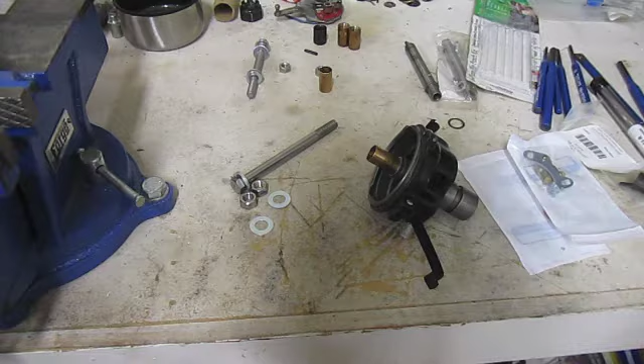Okay, I'm back, and I didn't have to go to any store because I'm sure some of you following along realize this. I didn't realize it till after I turned off the camera on the last clip. Remember, I had a small bolt, but I also have a big bolt too, right? And while it's 3/8, it is a longer bolt. So this is, remember from last time, it's like a little over 5, like 5 1/4. So what that means is I think this will work fine.

And again, the washers, maybe they weren't as precise, but these washers are good enough to cover the top of that bushing. So what I can do now is slide this in. And I'm just using 2 washers to be safe on the other side. Now that gives me enough thread right there where I can then put this on. Tighten this down.

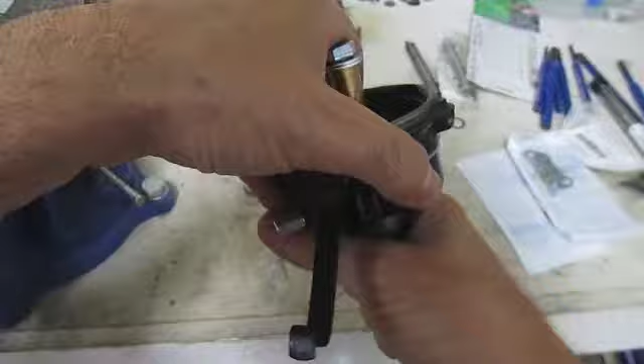Now I want to get things aligned, right? So get them aligned there. It's more important to get lined up here. I don't want that bushing to be off center, so I'm going to try to watch that as I go. So I think what I may do is, if we come over here to the vise, maybe I'll mount it in the vise and then try to turn it from the bottom. So I think that's what I'll do.

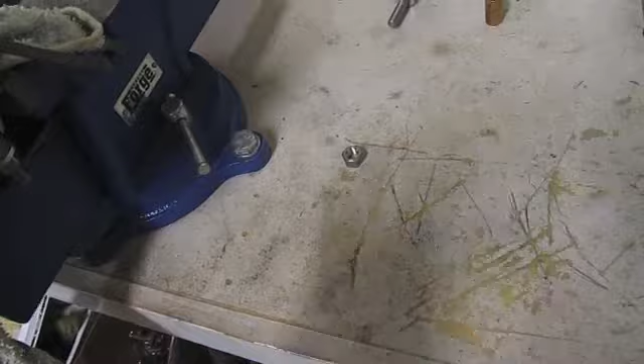So let me, sorry, not as prepared as I thought. Let me rest this here. All right, and this doesn't have to be too tight. Okay, and then what I'll do next is, if you look over here on the side, this is the bolt right here. So I'm going to actually tighten. All right. So we'll try to get an angle there of everything. Let me back off a little bit. Oh, that's about as wide as I can go.

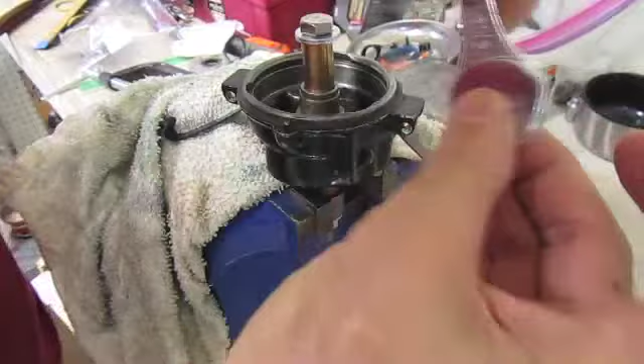All right, and then I need to get a wrench on here, right? So I think the wrench I'll need, is this going to be 1/2 inch, a little bit bigger. I'll probably need a 9/16. Will 9/16 do it? Yep, 9/16. Okay, so I've got the top and the bottom here, so I'm gonna tighten from the bottom and watch it from the...

So the idea is, I hope this makes sense as you're watching. So as I tighten this bolt, it's gonna squeeze, it's gonna basically push this down. Well, you'll see. So let's try this. So I'm gonna watch it go. I'm just slowly, it hasn't gotten enough where I need a second wrench yet. All right, so it's now tight. I'm just checking. All right, that bushing looks reasonably straight.

I'm doing this by hand. I'm not using a power tool, obviously, because you could mess something up really fast. So I'm going really slow with a hand wrench. Oh, let me hold that top. It's now, I think I'll have to get a second 9/16. Yeah, my wrenches are all over the garage because I got stuff going on. So let me see if I can bring up a second. Oh, good. Luckily I got lots of 9/16. All right, so now let me check again. I'm just visually inspecting here to make sure nothing's off.

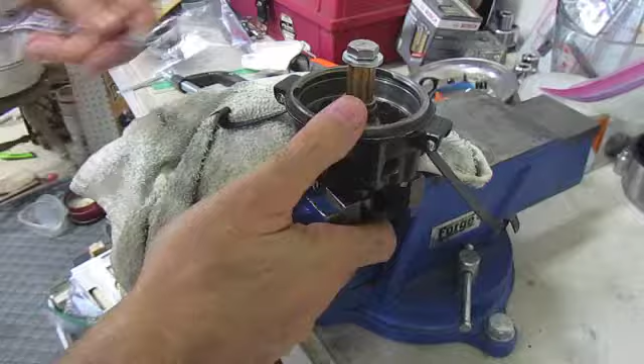Okay, so now as I hold this, oh, now I'll just screw the top. Okay, so now it's easier. I can just spin it on the top. Is that going in all right? Let's see. All right. Well, it's screwing on there. I guess I could mark it with a magic marker and you could see it. So let me get another angle here as I go. And zoom in.

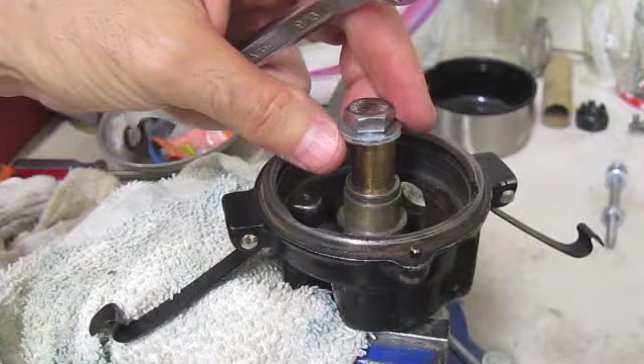Now the washer's a little off, but it's flat against the bushing. So I could back off and center it. Will I do that? Yeah, I'll just maybe do that real quick. So here, let me just back off it real quick. Loosen it a little bit. Get those washers centered. And then, well, did that help? Hold on. All right.

Okay, that's a little better centered now. So let me just continue now. Now the good news is bushings don't cost that much. They're relatively cheap. So if you mess up this part, I already know how to take the bushings out. So if you mess it up, the worst case is you just take out the bushings and put a new set in again. I don't want to do that. I'd like to get it right the first time.

So this appears to be working. I'm eventually going to get down to the bottom threads on the bolt at some point. In fact, I think I'm there right now. So if we look at the bottom, it definitely got lower, right? Well here, I can compare. Let's look at before and after. So it definitely is pushing the bushing into the housing of the distributor. But I got to the end of my bolt here, so to speak.

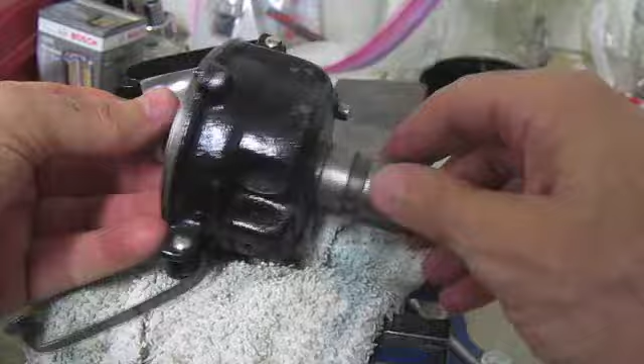But what I'm gonna try to do real quick is look if that other bolt, take this out over here. Let's see if this one now, this is the 5/16. Yeah. So a little shorter bolt with the washers. Oh, look at that. That might just catch it. So let me do that. All right. So it looks like I found out by trial and error that you might need 2 different size bolts to do this project.

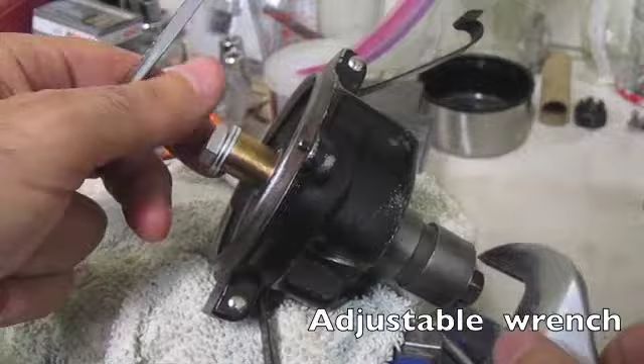So now, same as last time, I'm going to make sure the washers look centered. Started on the bottom, and now I might be able to just do it like this. Now, these aren't 9/16, right? So it's a 1/2 inch. So now I got to switch to a 1/2 inch, but then I need another one. I got to scrounge for a 1/2 inch. Do not have one, so in a pinch, I am going to use a crescent wrench. Since there isn't a huge amount of force on here, I'm just gonna use this.

God, this is really taking up a lot of time, sorry.

Okay, so now, as we come over here a bit, I will continue now to basically wrench this down. Oh, washers are off. Hold on. Get that lined up. That's not right. Okay, so I think maybe the bigger washers would be better if I had a choice. So let me get those lined up one more time. All right, that's a little better. Not perfectly centered, but better centered. And then you just keep wrenching down.

Okay, it's going, but it's taking a while because I'm doing it by hand. I want to be careful. It's taking longer than I thought. But let's stop and do another checkpoint. So make sure it's not going in wrong, like out of center. That's pretty centered on the top. That's going in, and again, if we just compare it to another bushing, I got it probably about halfway in.

So I'm gonna keep doing this the rest of the way, and I should have enough threads here. Well, we'll find out. I could run out of threads on the bottom here too, but I'm gonna keep doing this so you get an idea of how I'm pushing the bushings in as I'm using this bolt method.

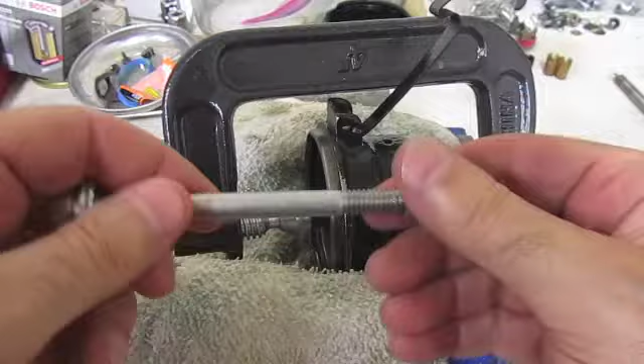So something unexpected happened when I was doing this bolt method. Somehow I stripped the nut here on these threads, and it was perfectly matched. It was a brand new bolt and nut, and I was tightening it down, and I don't know, but you can see I just stripped it out. So these aren't expensive, but I wasn't expecting that. So that made me switch over to the C-clamp method.

So this is a 4-inch C-clamp. You can get this at pretty much any hardware store. You get them at Harbor Freight. And you can see I still have some of the bushing here that's not pushed in yet. So I want to see if I can do the rest of the way.

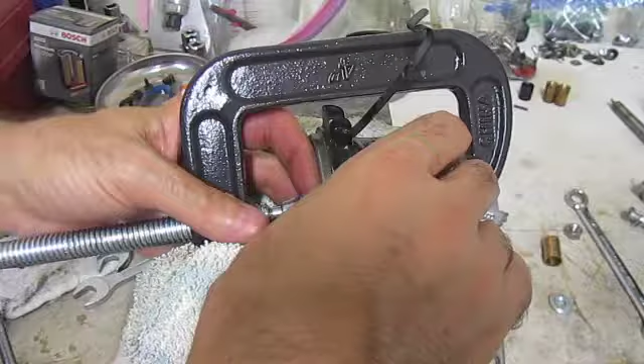Now this part is flat against here. So again, you want to make sure it's centered, so you can back off a little bit and just make sure that's centered properly on the bushing so it's applying even pressure. And it appears it is.

Now, basically, this is the end I'm twisting, right, to make it go in here. And this is loose. I had it in here in the vise, so let's do that again. So I'm twisting, and I guess it's going. Maybe it's my angle. Hold on. I'm getting on the side here.

It's a little harder than turning the wrenches, but it does work. I think it's going to take longer. So let me... well, actually, yeah, I may have to put something around here, like a little pipe or something, to give me more angle. There's not much leverage to get on here. But this might work finishing up, so let me try that and come back.

So this is the smallest pipe I could find. There might be a smaller one somewhere, but this works. It looks like a big nipple pipe, but you don't need a pipe this big for leverage. You can see I put it on the end here, and then I'm holding it steady here. This goes a lot easier, so I can get more leverage.

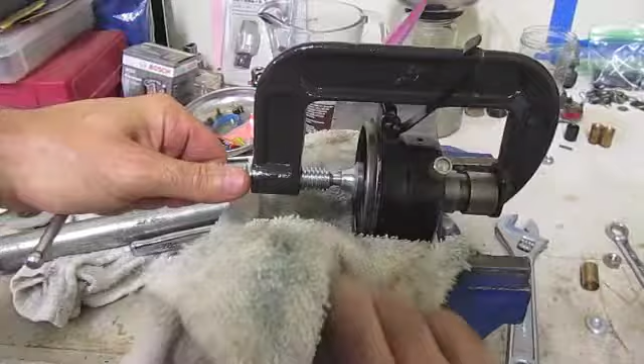Okay, it's going off a little bit, so I need to back off. Oh, because my distributor body slipped in the vise. Let me see if I can just do the rest of it that way. Is that showing okay? Let me back off. Well, I'll need the pipe to back off too. Cut myself good there.

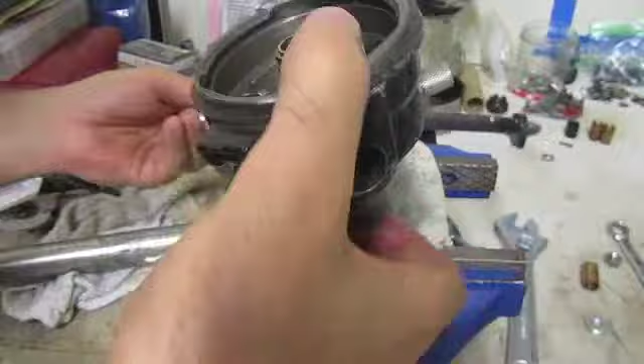All right, so it's almost all the way here, just to show you, I'm almost there. So that is almost pressed in. I just have to finish that up, but it appears to be pressing in evenly. I don't see any major damage, just to my finger. So I'm going to finish this up with the C-clamp, and I might start the bottom end as well with the C-clamp. So let's come back in a few minutes.

Okay, I'm perfecting this as I learn it. I think the best way if you're using the C-clamp is you take this one end with a cheater pipe and apply leverage this way. And then, because this rotates a bit, you want to hold the C-clamp with your other hand.

And you want to keep an eye on the top of your bushing, because this will slide around a little bit. Like I said earlier, it's not as precise as the bolt method, but just keep an eye on it and go slowly. I don't want to damage it. My camera's right here. So that's the best way to do it.

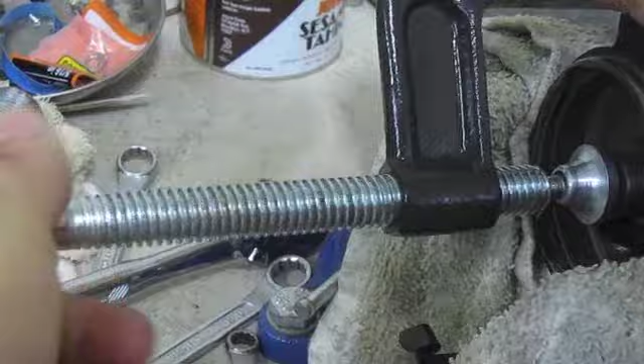And again, as you're doing it, make sure you watch right there. If this slides off or gets off center of your bushing, just back off. Again, you need two hands, right? So just loosen this up. Loosen that up. And then readjust it as necessary.

You can see I'm almost there, folks. That's almost in there. Here, I'll zoom in. I'm almost there, so I can almost declare a success. Whoop, back off. Just that little, that's it. So the C-clamp method will work.

So I may do that on the other end too, because my bolt option was unexpectedly cut short, so to speak. All right, here is the finished product. So the top bushing went in.

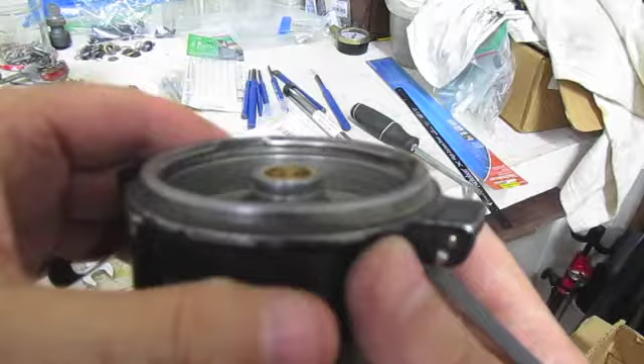That's almost flat. I can see it's not quite even. There's just a slight difference, we're talking thousandths of an inch, maybe one or two. But what I'm gonna do is, since the bolt stripped out on me, get a new bolt and tighten this down one more time and use this washer method to push a little more. With the C-clamp method, I think that's about as good as it's gonna get.

I mean, you could probably run that. That's so close to the top. You could probably run the distributor like that, but I just want to get it pushed a little more. It could be improved by another thousandth. Sorry, you can't see what I'm looking at. Yeah, I think I could get it a little bit flatter, but that is successful there, I think.

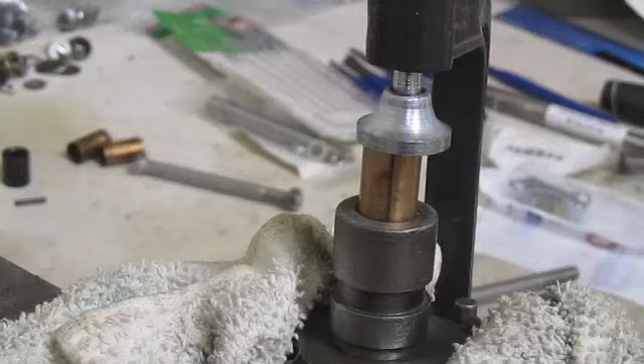And next I'm going to push in here. I may skip showing you, it's going to be exactly the same, just on the bottom. I don't know if I'm going to film that second part because I'm already way over time. So as I start the second bushing, this is the bottom of the distributor. I'm trying the C-clamp, and the problem I have is starting it. The best description is it tends to wander.

So the C-clamp, this side should be machined flat. It's a lot flatter than the other. Do I have the old C-clamp here? No, I must have put it back. But anyway, this is the flatter of the two ends, but as I try to adjust this, you'll see I'm trying to keep it centered on there. So I'll start it like this. And as I tighten down, I think that's kind of straight, but do you see how it wanders a bit? I'll try it again.

Wait, one more. This is kind of centered like that. And then I'm using my fingers to keep it centered. Don't want to pinch my fingers. And as I slowly screw this down, it's already off. God. It doesn't want to stay even to start it. Not to finish it, but to start it, it's very difficult. It wanders is the best word I can describe that.

Whereas if I do the bolt method, this is a flatter surface than this. This is pretty flat, but not as flat. But with the bolt method, when I did it on the other end, when I started screwing this in, it holds these washers directly. Even if it slightly wanders, the washers are still there. So I'm gonna start the bottom bushing, start them in general, with a bolt, and I could finish them up with a C-clamp, or get another smaller bolt. This one is all stripped, but get a shorter one to finish it up and see if that works. Yeah, the bolt method definitely works.

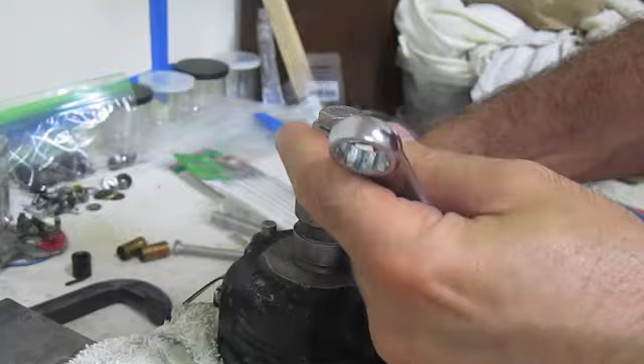So I'm still on the bottom. I said I wasn't gonna film this, but I did anyway because I thought it was important that even though it still wanders a little bit, there's not nearly as much play or slack as I tighten this down. And the washer stays centered over that bushing. So as I tighten this down, I'm holding the nut underneath, you can see that. As I tighten this, it's pushing the bushing down, but more importantly those washers are keeping it even. I don't want to put uneven pressure and bend or damage the bushings.

And this bolt method works at least until I get to the end of the threads. See, I'm at the end of the threads, but at least it started it. So if I flip it over, the threads only go down here, so basically I had to stop here. So I think this is definitely the safer way, at least to start the bushings. There we go.

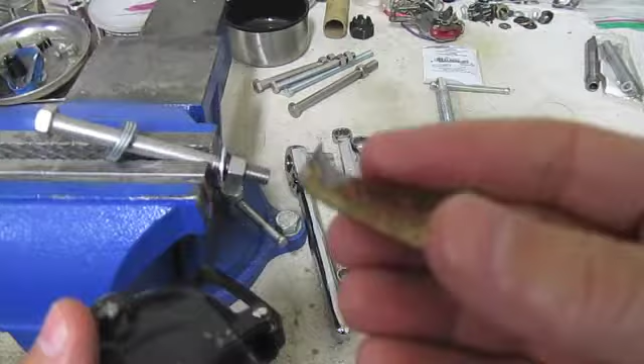Okay, fast forward, and I got both of the bushings pushed in, the one on the bottom and the one on the top. It's pretty flat, even. So we're ready for reaming next. The bottom one got scuffed up a little bit, you can see here, but reaming should even that out. I was curious, I saw some little patterns inside. I spread apart one of the old bushings. It's got tiny little dots, like little dents on the inside.

I meant to look that up before I recorded this. It might be to trap oil, or it might be to help with the reaming process, but they have some kind of use. I gotta put a comment in here later. But that's what it looks like on the inside of a bushing.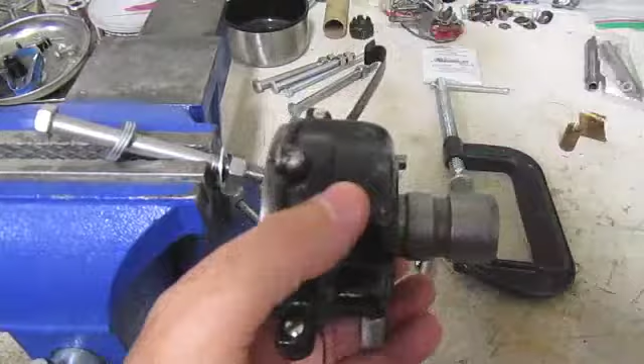Let me see. Oh, so I found out why these bolts are stripping. It puzzled me the first time, but the second time I was even using the larger diameter bolt, the 3/8 instead of the 5/16. And like this one's stripped also. And I'm like, what the heck? Two different diameter bolts, and they're both stripping as I try to push in the bushings. What's going on? I figured it out the hard way, so you don't have to learn it the hard way.

The short answer is the washer. As you tighten the bolt, it was stripping the threads. When you put the bolt in here and you put the washer on the end and then you're tightening the nut down, remember there's a bushing here, right? So imagine this when the bushing is sticking out before it presses in.

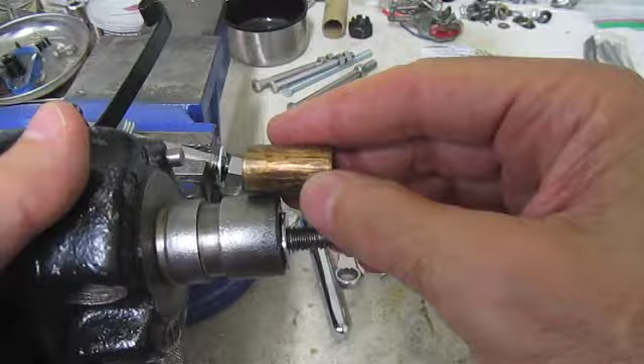What was happening is when this washer was on top of the bushing, as I was tightening down, unless you keep that really centered, and I had it horizontal like this, that washer probably wandered as I was turning it and just rested there. And then when you keep pushing down on this, it starts damaging the thread. You can't really see in there.

I got an example here of what it normally looks like. Normally with a washer, like a bolt on a frame or something fixed, as you tighten down the bolt, the washer doesn't move. So normally there's no problem stripping those threads. But the problem with the distributor is having this moving, so as you tighten down this bolt and you push it in, this washer, I didn't have it exactly. So what I did to get around that later, sorry, this is like a long video.

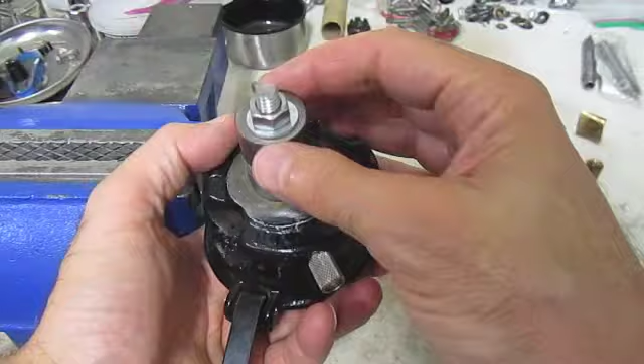I put the distributor in the vise and I had it vertical like this. That way I could monitor it, look directly above it and make sure those washers are staying centered. A few times I had to back off and center it. And eventually the bolt and washer method did press it in the way I wanted, and it's nice and flush against both sides.

So what did I do with the stripped bolts? Well, luckily I have a thread chasing kit, and that's what I used. And I found out, by the way, these bolts I'm using are coarse thread, not fine thread. I have another video you can look at if you want to learn how to chase threads.

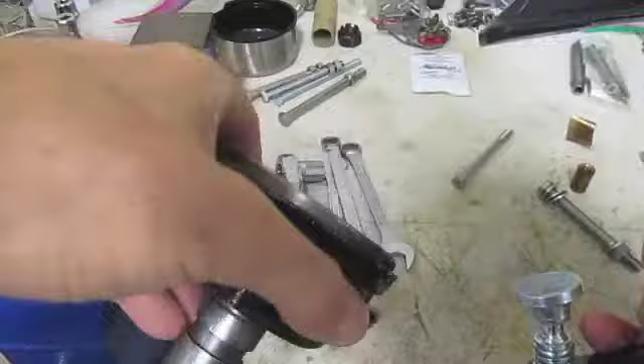The other thing about the C-clamp, this can work. I don't like it because I don't have as much control over it. Here's another thing I found out, and this might be my C-clamp. Hold on a sec. There's one end you screw and one end fixed, right? As I was trying to press, I wanted this flat end against the bottom. Well, guess what? As I look at the top here, that won't meet, because the body of the distributor won't let it go flush against there.

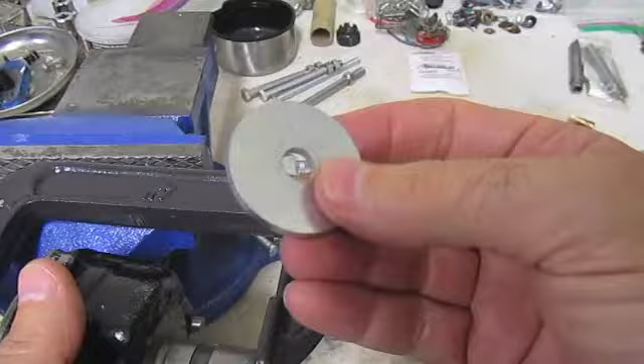So what I had to do was flip it, which is not a big deal usually. So that flat end goes here. But for this end, I was trying to find something flat, a flat piece of metal, and I didn't have one easily available. I dug up this, it's called a fender washer. I was trying to put it in here and then tighten the C-clamp down that way because I wanted it consistent.

But this kept moving around. You could press in bushings for a distributor with the C-clamp, but my preference after trying it both ways is just use the bolt method and keep an eye and make sure your washers aren't off center as you're tightening down. And if you have a thread chasing kit, that'll help if you screw up the threads. These bolts aren't expensive, but you don't want to keep buying a bunch of bolts every time you strip them.

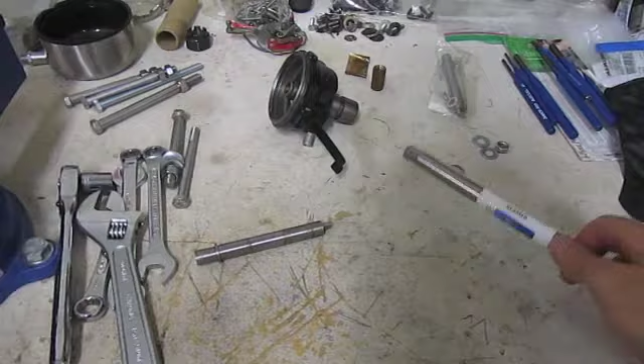Anyway, now I'm moving on to the next step, which is reaming, and I'll get to that next. Okay, let's get to reaming. So I've been reading about reamers. This is a hand reamer, and it's not adjustable, it's fixed. This is an expensive piece of equipment. I don't know what it cost in 2015 or 2020, but in 2024, this is about 70 bucks before shipping and handling. So it's expensive.

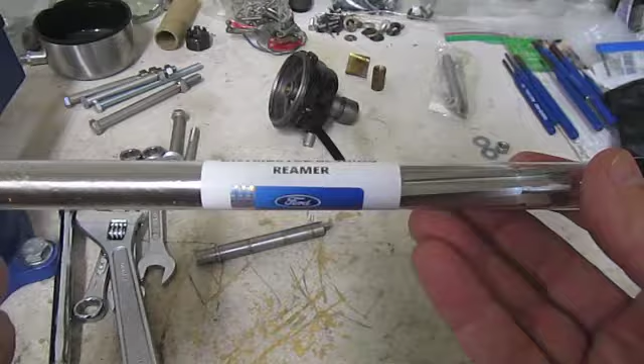I hesitated to get it because it's not adjustable. It can only be used really for one purpose. But I got at least 2 distributors to rebuild. Maybe a few years later I rebuild more, so maybe I'll get my money out of it. But this is especially made for a Model A distributor. And real quick lesson on reamers, this will shave metal on the inside of the bushings to allow the shaft to pass through.

This is a hand reamer, and reamers are sharpened to go one way. So the blades, if you hold it clockwise, it cuts. I can feel the blades there just lightly. If I go the other way, there's no cutting. So what that means is when you go on one end or the other as you're reaming the bushings in your distributor, you always turn it one way. You never go back the other way. So as you go through and turn it, and even as you pull it back out, you're always turning it, in this case, clockwise.

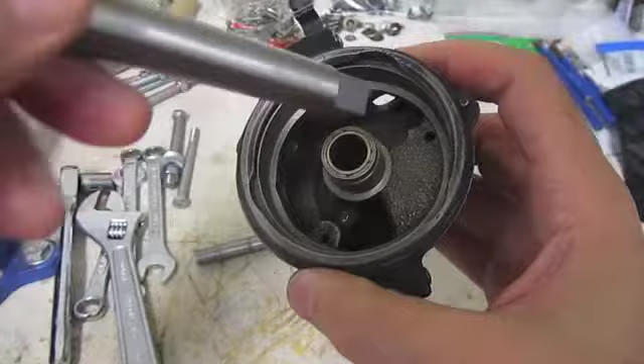Now, with a distributor, I think most of you know, when it's on the head of the engine, it rotates counterclockwise. So one question I didn't know, I got to read up, is does it matter, if I'm reaming this clockwise, but the shaft is going to spin counterclockwise, is that optimal or not? Should it make a difference? Now, I'm probably going to run the shaft here with oil once it's all shaved out, but I may ream from the bottom, because if I go clockwise this way and I ream it, if you flip it up, that turns out to be counterclockwise on the top.

So I'll try that. You should probably use some oil. I happen to have tap oil, so this is good for this kind of work. But if you don't have cutting fluid or tap oil, maybe some thick motor oil would be equivalent. What else? Before it's reamed, the shaft won't go in if you try to put it in. Now, I think some people are saying, oh, I can just put the bushings in, but if this were to go in without reaming, I would be concerned it's not a snug fit or the proper fit. So the shaft should not go in because it hasn't been reamed yet. If it does, I would be concerned, but hey, it's your distributor, see what works for you.

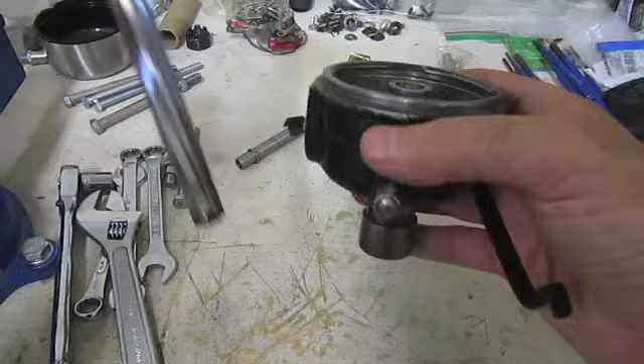What else did I want to say about reaming? Oh, this also does not have what's called a pilot. Some reamers have like a starter guide, because you want to keep it centered as much as possible. You don't want it wobbling as you're trying to ream. And I'm concerned about that because I don't have a pilot to guide this in here. So what I'm going to have to do is back to the vise. I could either lock the reamer in here like this and turn the distributor body on it, or I could lock the distributor in the vise and then turn the reamer this way.

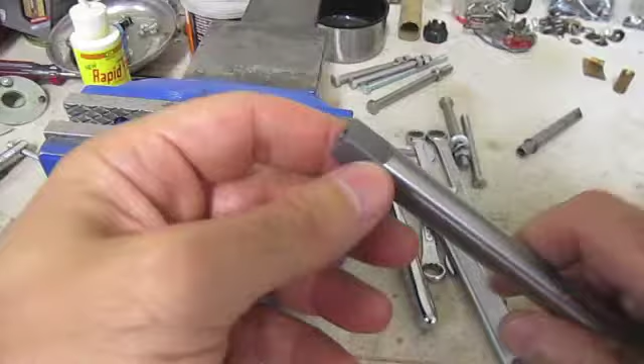I might do this way because I would have a little more vantage point from the top looking down to make sure it's centered. And there's kind of a special tool you can attach that is square here with handles. I'm going to use a wrench to basically turn that. So I think that'll be good enough. So I'm going to try this out. Worst case, if I mess up my bushings, it's a few bucks and I bought some extra ones. So I could just pull these out and press them in again. I don't want to do that, so I want to make sure I get the reaming correct the first time. So that will be the next step.

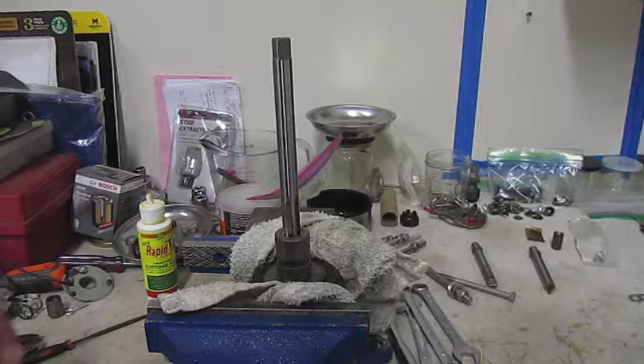Okay, I'm starting the reaming process. I put a little of the tap oil on here to help it. It has a tapered tip, so when I started it, it kind of hopped in and centered itself. So I am watching it, but it seemed to go in by itself.

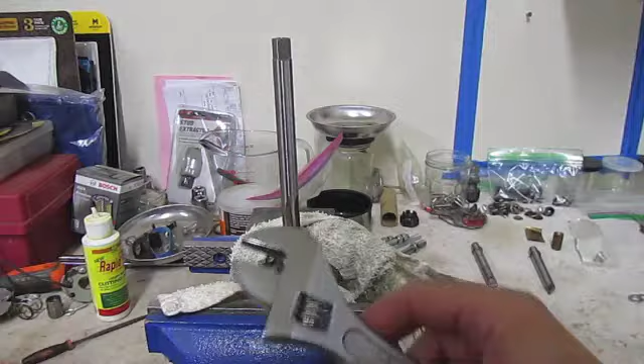I'm turning the top with an adjustable wrench. I have to say this is probably not the recommended way. There's a special tap tool, which has two handles and an adjustable square. You can close it on the end of this and turn it. It gives you a little more angle.

What I'm having to do in absence of that is putting this on the top and trying to use my hand. I'm not on the sharp edge, obviously. I'm up here on the smooth part of the shaft, but I'm turning it, again, one direction, clockwise. You can see it's gone through. I'm trying to pull it down as it goes. It's not optimal, but that's what I'm working with right now.

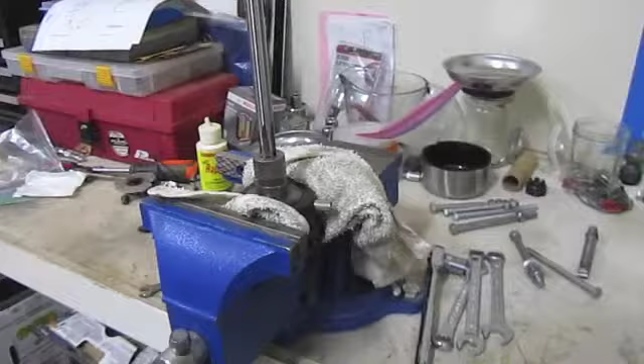And then I'm checking under here, you can't see in the bottom, but I'm checking for when it comes through. In fact, there's a few, can you see that? Little bits of brass, little bits of metal. I can feel it. It's definitely reaming. It's cutting the inside. So let's go finish this process, and then I will take the new shaft, not the old one, and we're going to try to fit it through and see how it fits.

Okay, I'm finishing up reaming. I checked on the bottom, but leave enough room because you want the reamer to go all the way through both bushings. You want to, I guess, line bore it, and then when you take it out, remember, don't counterclockwise it out.

It's a lot easier coming out. You can feel it coming out. So what you do is, I'm just grabbing and pulling it up, and again, keep rotating it clockwise, and it just comes out. Ooh, look at all that metal. Those are all shavings of the inside of the bushings.

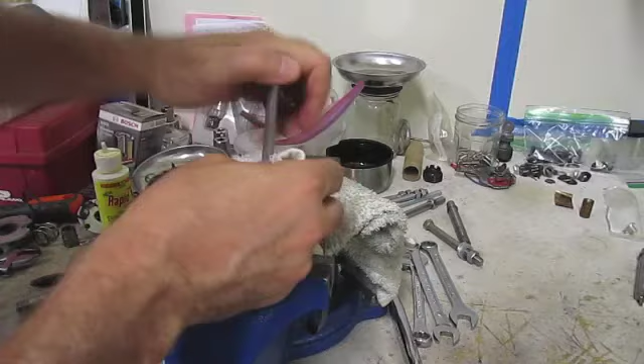So, moment of truth. Oh, I want to clean this out before I put the shaft in. Hold on a sec. Sorry, I'm not prepared. How about if I just take one of the old bolts? Let me try to quickly clean it that way. Yeah, I can see there's shavings. I don't want to have the shavings cut. Try to clean it out in there. This is not the best rag. I should get a pipe cleaner. I won't put it all the way through, but I think the top part is okay. All right, mostly clean. All the oil's gone, I guess.

So this is a brand new shaft. What I want to do between video breaks is measure the shaft that was in there before and this one with a micrometer, to see if they're both the same diameter. But anyway, let's check with the new shaft, because you should be using new parts. Just assume everything old is worn.

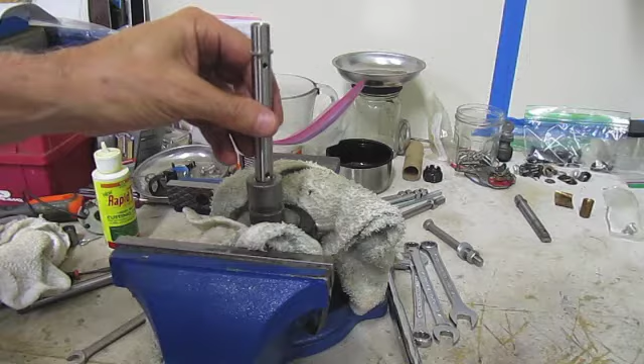Ooh, look at that, folks. There is a slight... It goes in smooth, but there's a little play, like a thousandth. I can hear it. Ideally, you don't want any play, but I may have to live with it. I'm using the right reamer size, so I can't change that. So let me put that together, put some oil on, and then let's see what it looks like after I clean it out and try the shaft. Okay, lots of good learning moments here.

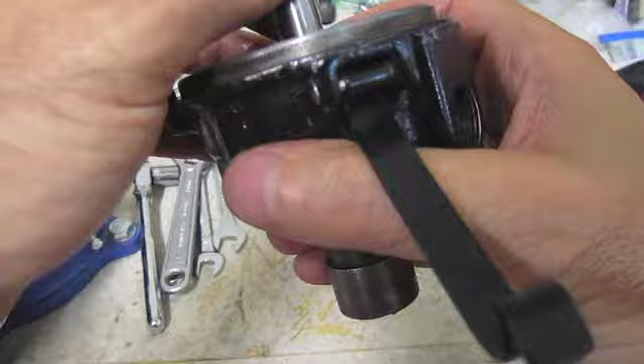So my concern earlier is okay now. So what I did was I put oil on the new shaft, and I put it in this way where it should go, like top to bottom. And you have to get it through both bushings. So the first bushing, you'll feel a little play, but when it goes through and touches both bushings, then it's like there's no play. So that's how I want it. I expected it to be like solid in there, no movement at all, which it is as I hit this.

But I'm hitting another small problem: it's not going all the way through. It's like bottoming out. I'm hitting a burr or something at the bottom, so it's stopping there. Well, actually, is it working through? Maybe I could work it. I could run it in, right? So what is running in? I was gonna get to that next.

Running it in would be, you put a lot of oil on it, and you hook it up to like a hand drill, and you just spin it, and remember, it goes counterclockwise when you're on top of the distributor, and you just run it a few minutes, and it just kind of helps it seat in there. It's called running it in. That's what it was explained to me.

But this bottom, it's not going all the way through. Maybe I could try to run it in. I don't want to ream it again. Maybe I could just lightly sandpaper the ends if it's like a little burr on the end. I don't know, so I'll figure that out. But the good news is if you're testing it and you're just at the first bushing, there'll be some movement. But because you kind of line bore it, now when it's in that second bushing, that's real solid. So that's better. Okay, good news. Let's go on to the next step.

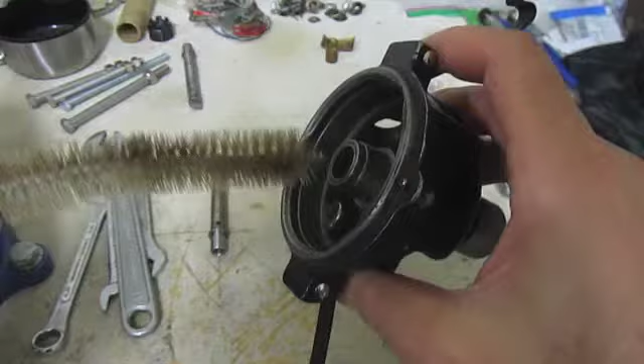Okay, let's catch up from the last time. So when you first ream it, you want to make sure you get all the metal particles out, right? There's a few ways you can make sure you get that out. I have this nylon bottle brush, it's not metal, and you can basically clean it that way. You can use a clean rag, maybe a microfiber towel, something small that's not sharp, and run it through here and clean the inside of the bushings.

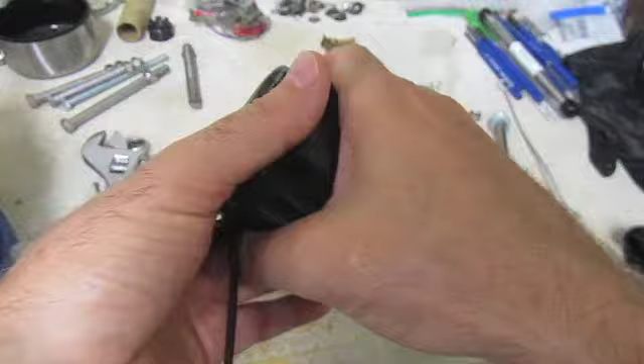Now if you have a high pressure air hose, that's probably the best to use. Mine is a pain in the butt; I don't want to hook it all up just for this small thing. But you can get this canned air, it's just compressed air in a little can, and you can clean it out that way. You can even use carb cleaner, so if you have carb cleaner around the garage, just spray this. That'll help get it out. After you make sure it's clean, when you put the shaft back in, you put oil on it.

In the last video, it was hard to go through and it wasn't going all the way. I did not ream it a second time. I very lightly sanded, like 400 grit, the very edge here in the bottom, and that allowed the shaft to pass all the way through, no problem. Now, when I first put it through, it would not turn, it was too stiff. Once you ream it, you don't want to ream it a second time if you don't have to. The better way is you run it in with a drill.

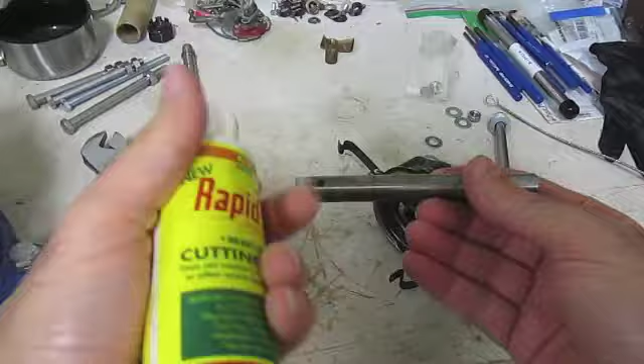What you do is you take this shaft and put some oil on it. I think clean motor oil would be fine. I happen to have tap oil, so this can work as well. I'm doing it on the side here, just rub that in. That could be good for your lubrication. And after that's in, again, there's no play. That's in there perfect.

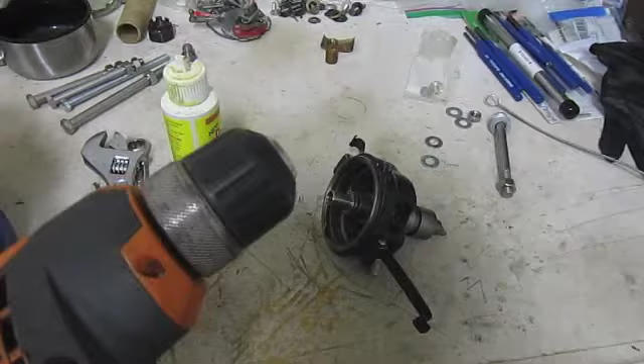I did a good job on that part. So I happen to have two drills, and not all drills are created equal, right? I first used this drill, and the shaft is too big for the end. Luckily, I had a second drill. I'm not advertising drills here, but if you look, one drill's got a bigger chuck than the other one, right? And so this one, I was able to fit the shaft on there.

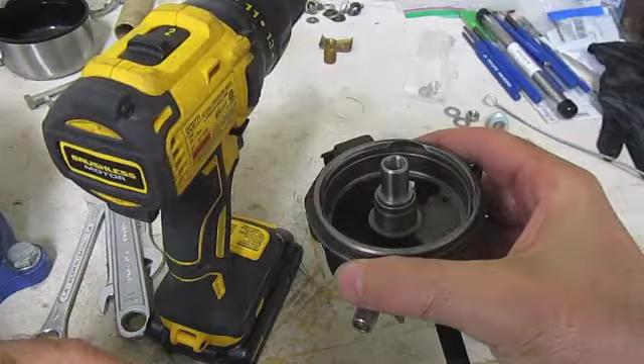And so all you got to do is just open it up. Now you want to make sure it rotates counterclockwise, because when your distributor's in your Model A engine, it rotates counterclockwise. So I want to turn in the same direction. So make sure you're spinning counterclockwise, in the right direction. And then all you do is just lock it down here, get it tight. All right, that's pretty tight. Don't get caught on your thumb there, and you hold it, and you just let it go like that.

Mine, I don't know how yours will turn out. I ran it for like a minute or two, and that seemed like where it was really stiff. Then it was like, oh, I can turn it now. So what I'm going on to next is I need to put the pin in here and the sleeve and the washer. I need to basically adjust so that there's no vertical play. I'm successful in the bushings, this shaft, even if I had a feeler gauge in there, it's in there good. It turns, but no slop, you should not be able to get any movement at all. So next I'm going to work on the vertical part.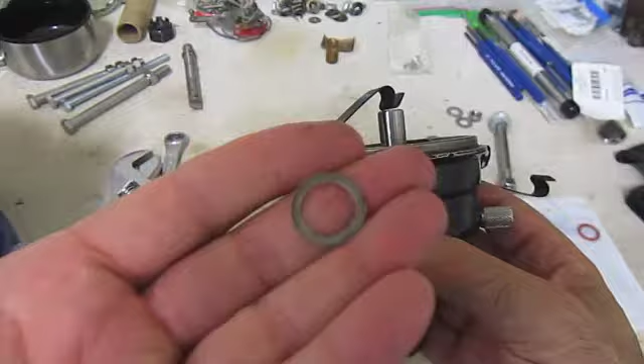For adjusting the vertical play in the shaft, there's two washers you're going to use. There's a very thin steel washer that goes under that collar. It'll go under right there. That's on the top. And on the bottom, where the sleeve goes on, I haven't put the sleeve on yet, but before the sleeve, you'll put on this fiber washer. So the names of these are, this very thin washer on the top is called a Distributor Cam Shaft Thrust Washer. So 5 words for that little piece. And then this little fiber washer is a Distributor Shaft Sleeve Fiber Washer.

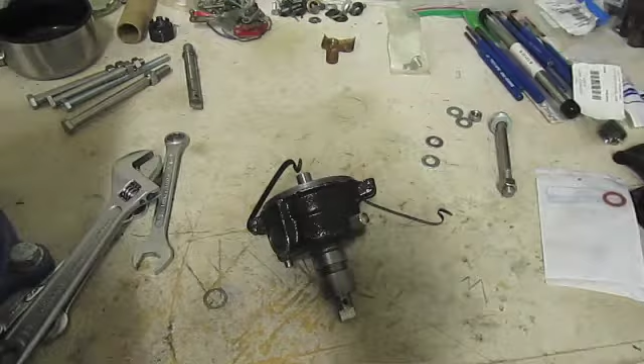So what's interesting is, remember I showed you the original diagram I was going by. I'm not saying it's a bad diagram, but it's incomplete. This MAFCA Hershey 2012 is missing this thin camshaft thrust washer in the diagram. It's not anywhere there, but I know it's there because earlier in the video I took it out. It was already in there before I disassembled it. And so I'm gonna give a shout out to these guys. This is Bratton's Antique.

In their catalog they show diagrams, and sure enough, in their diagram they got this little part here that's 29A, and if you look on the table, you can't see, it's too small, but 29A is camshaft thrust washers. So this diagram properly shows where those 2 washers go. This one's almost complete, but it doesn't have that. So if you're potentially downloading and using this diagram, just take a note, it's missing this thin steel washer. And let me show you where it goes.

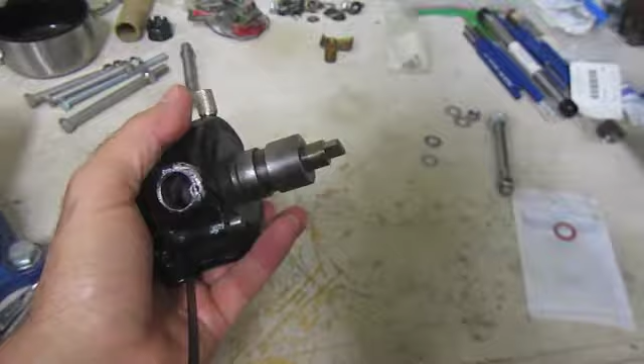So the next steps will be, that will go on here, like that. It's on there by the collar on this shaft, and then you slip it through like that. And then I'll take this fiber washer out of the bag and put it on the bottom there, and then you will put the sleeve. Sorry, I am not as organized. You will take the sleeve, make sure that's all the way down, and put that on like that. So there's a hole, you got to line up the hole, you got to put the pin in there. So I'll do all that next.

And so when you're adjusting the vertical play, you don't want to put the pin all the way through yet. So this little pin here goes in that hole right there. Do you see how it's kind of part the way? You don't want to push it all the way through yet.

In fact, we'll just do it now. So there's a little bit of play, but I didn't put this fiber washer on yet. So I'm going to take a break, put this on, and let's adjust. And then when you've got the play taken out vertically here, then you're all set to go and you can finish this up.

So this project is almost done. Thanks for sticking this far into the video.

Okay, I got the fiber washer on the bottom here where the sleeve goes, and it looks like it would line right up. You can see the hole through there. I see daylight. So I got the pin, but it's just not going through. It's just a little off to keep this pin from going through.

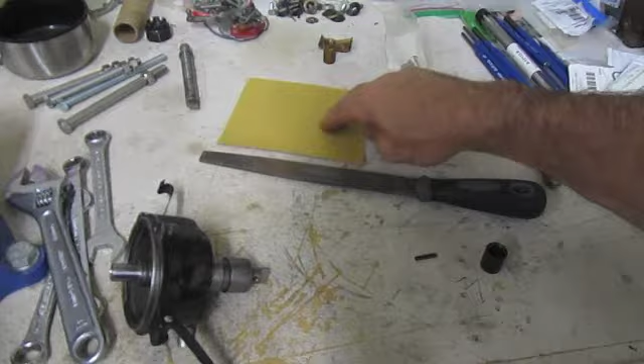So what you have to do is take a little bit off the washer, and you're going to take it off the fiber side. Don't try to sand or file down the metal washer on the top. Do this bottom one. You just have to do it a little at a time, and you could use either sandpaper and just rub it back and forth, like this. Or if you have a file, you could do it like that.

But just do a little at a time, try it, adjust it. So I'm going to do that a few iterations. And when it fits where I can get this sleeve on and put the pin in without having to force it through, then I got the right size. So just take a little bit off this fiber washer so that everything can line up.

Okay, I sanded it down enough where the sleeve will fit on. So I decided to use the sandpaper method. You can see all the pieces of, this is a red carbon fiber, so you can see all the red dust. I don't want to spill it all. It's 220 grit. There it is. Well, I'll spill it anyway. Crap, now I gotta clean my distributor again. Anyway, I was trying to flip it to show you the grit, 220.

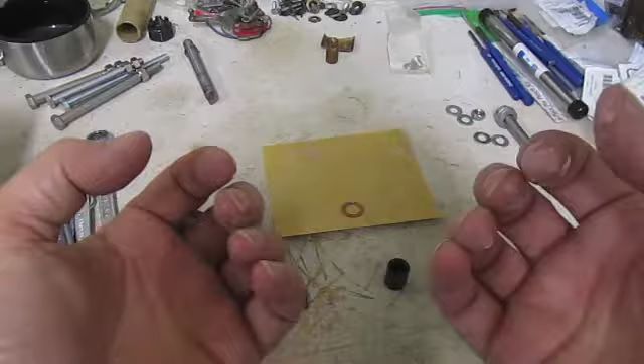And what else? So keep in mind, it will file your nails. So you see, I got a very straight fingernail there, and that's from, if somebody has a better idea, I was just going back and forth like that. So just keep in mind, if your fingernails are short, they're gonna get shorter afterwards. No big deal, they grow back.

So after that was done, I tried it a few times. I clean it in between. I got a rag over here. So I slide it on, put the sleeve on. I'm gonna get all this dust cleaned up before the final assembly. But for just fitting, it took several times. I just go a little bit at a time. I don't want to overdo it. But then finally, I got the pin through. So you can see right here.

I had it through, folks. Hold on. Only when I'm videoing does it become difficult, but son of a bitch, come on. All right, there. I swear this just went through. Okay, one more time. Otherwise, I'll have to maybe refilm this part.

There you go. So do you see how, well actually it's almost all the way. You can see that's how you want it. So now you got that in there. You got the washer on the top, the fiber washer on the bottom. So now we're gonna test, just yank on it. Turn, make sure it turns. So turns good by hand. Still turns fine, no slack there.

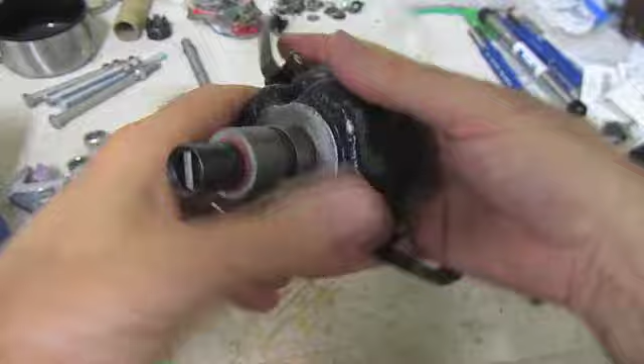And to be honest, I must have got the carbon fiber just right. Wow, didn't know it would be that good. There is no slack going up and down. I couldn't even get a feeler gauge in there if I wanted to measure. So I'll get this all the way set up and done. So I think at this point we are close to being done for replacing the bushings in the shaft in a Model A distributor.

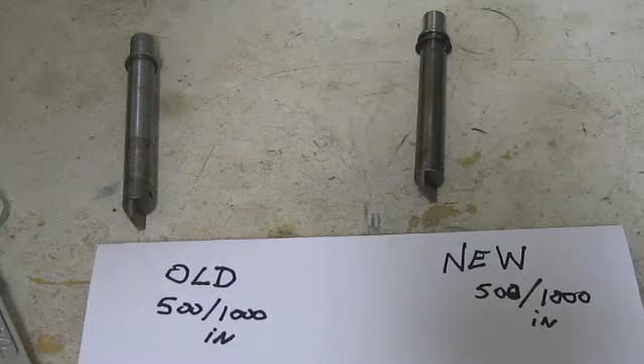This is just a quick aside. When I got this used distributor, the shaft looked like it was in pretty good shape, but you can't eyeball it, of course. You have to measure it. So this is the new shaft. This is the old one. And so I got a high precision caliper measure tool here.

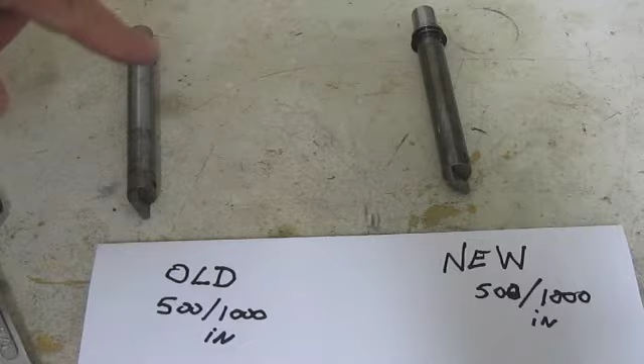Now, it is from Harbor Freight, so I know it's not like a $1,000 tool, but for something under 50 bucks, this is not bad to have in your toolkit. It measures in thousandths of an inch. And I measured old and new, and these are like a half inch, right? So 500 thousandths of an inch is half.

And it's potentially off, like, here, I'll do this one. This one is, can you see it? It's like 499. It's like 1/1000th off, which I think is okay tolerance. And it might be the caliper, because when I measure the new one, well, that's actually dead on 500 thousandths of an inch.

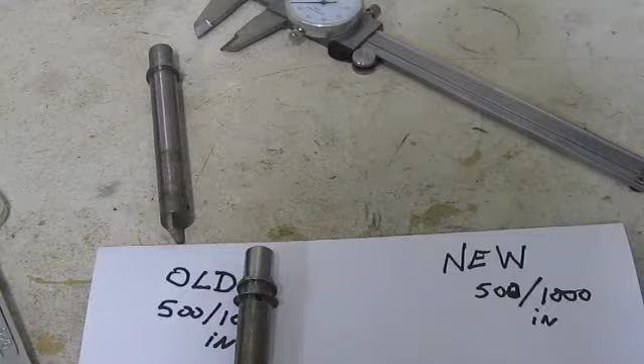So all this is to say, if I wanted to, I could reuse this, I think. I'll just keep it as a spare. But I got the new one, I already paid for it, so I'm just gonna use the new shaft.

Okay, there's one final important thing you need to do before you finish the project. And that is, once your distributor shaft is mounted, not completely assembled yet, you got the washers in, you've already reamed it, you've already run it in, you want to make sure it doesn't wobble as it rotates in the distributor body. And so how do you check for that?

So I'm going to use a couple of tools here. I got these from Harbor Freight. I know people slam Harbor Freight for quality, but everybody's got some Harbor Freight tools in their garage. If they say they don't, they're lying.

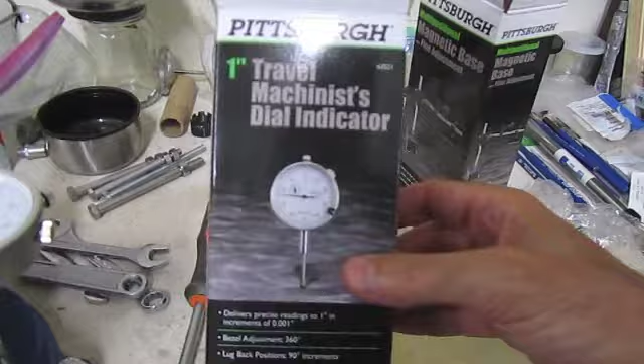This is a dial indicator, and this is a magnetic base fine adjustment. You really need that. You could get this and do a homemade kit or jig to mount it and adjust it, but I've really found this is worth the extra money. I've used this several times when I have to measure things very precisely. So let's get back to measuring precisely.

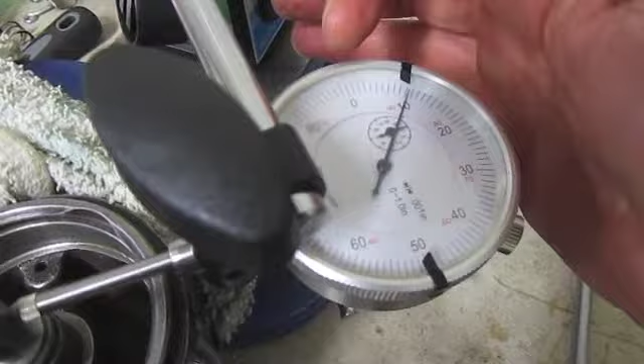So how are we set up here? I put the screw in the top of the distributor shaft so I can turn it with a screwdriver. And then I've set up the dial over here. It's at 10, right? I want it a little bit above 0 because I want to measure negative and positive movement, so in and out in case it wobbles. If I just tap it there, you can see.

So ideally it shouldn't move at all, right? If it's perfect, this dial, and this is in increments of 1/1000th of an inch, I have this little marker here on 10, a little above 10/1000ths of an inch. So what I'm going to do is rotate this shaft as we watch the dial.

Okay. In the video I'll have to see if it shows up in my camera, but from what I see looking directly at it, it's going in and out. It varies about 1/1000th of an inch as I rotate it counterclockwise. So I think that's pretty good, only 1/1000th off as far as centered. To be honest, I'm not going to redo this project because it's off 1/1000th.

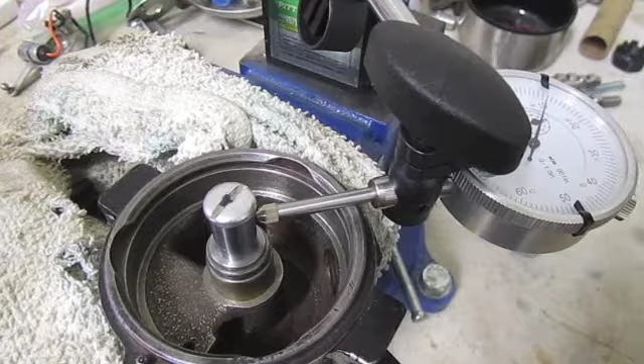If it was off 3-4 thousandths, I might have to go back and start over, but that's pretty good tolerance. So I think at this point, I can claim success that the shaft and the new bushings were replaced and rebuilt properly, and now you would just finish up the project. I don't know if I'm going to have another clip, but you know, put the plate back in, I'll clean it up, I'll probably put new points, check the conductivity here in the bottom.

There's a lot of videos that do that part, but because I really didn't see a good video showing rebuilding the innards on this part, I wanted to take some time, and it was more time than I anticipated, but hopefully it's been useful for those of you that are following along.